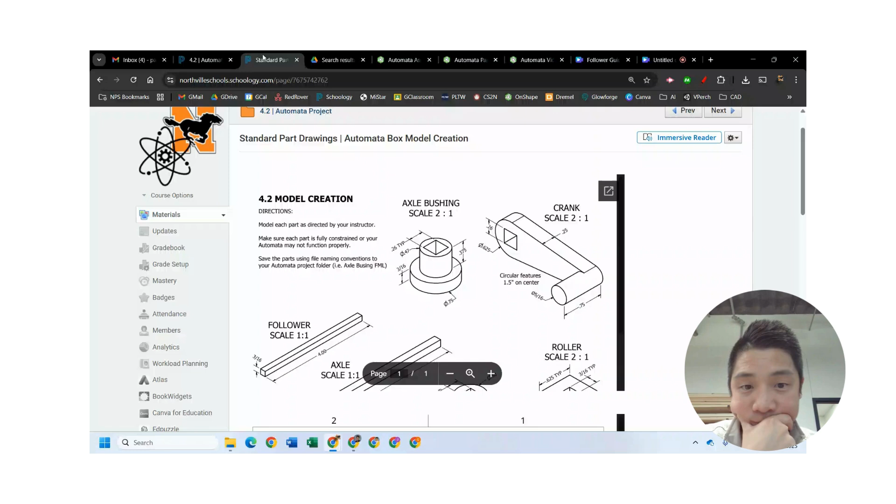All right, next video here is dealing with the crank. So this is what's going to connect to the axle and allow you to hand crank your automata. All right, so what I'm seeing here is a couple of circular features connected here. I'm going to assume that those are tangent to this circle as well.

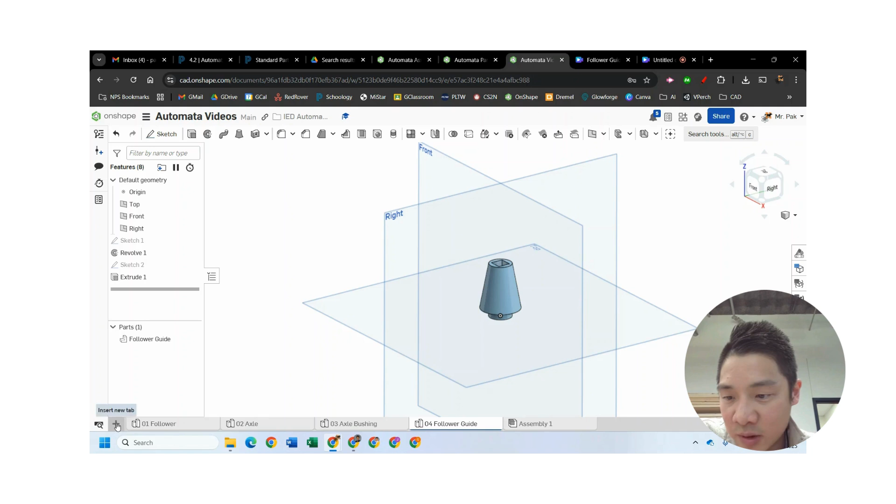That little crank has its own diameter. The thickness here is a little bit longer. So it might be a couple extrudes, but besides that, should be pretty straightforward. So let's get into it. All right, next up, we hit a new Part Studio. I'll go ahead and rename that now as 05 crank and start sketching.

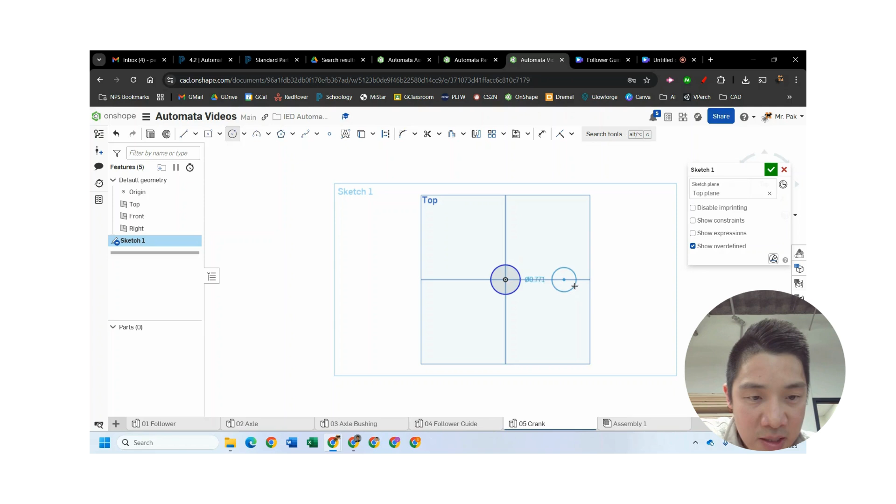We'll sketch this one on the top plane, normal to that. And I'm going to start with a couple circles. So I'm seeing circle here, and then along that, I'm going to make sure it lines up to the horizontal like this. Slightly smaller circle on that side. And let's double check the sizing here. We've got a 0.625 diameter on one end, so dimension this side as 0.625.

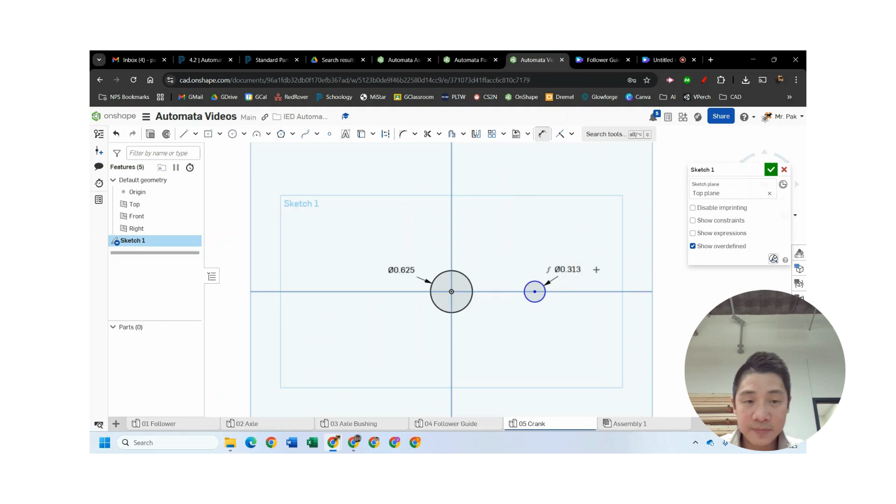The other side was showing a 5/16 as shown there. So let's bring it here, 5 divided by 16. And the other part that you hopefully notice, it says circular features 1.5 inch on center. So that means the distance between here to here is 1.5.

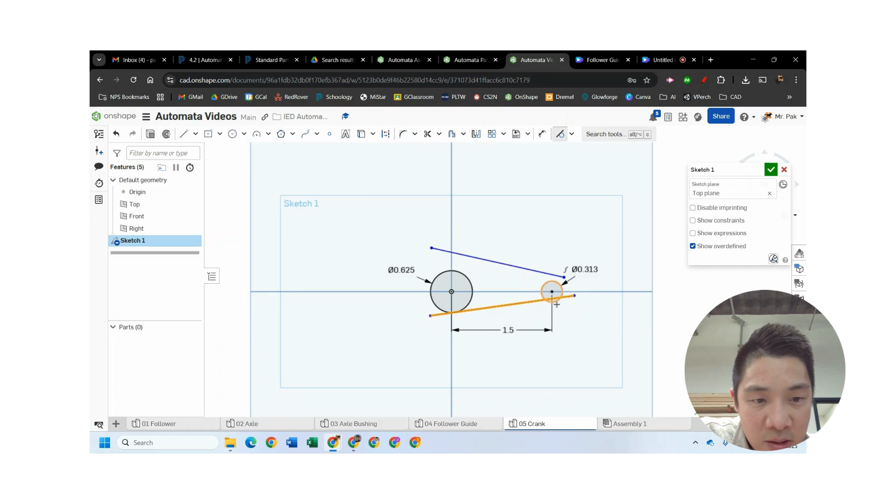All right, after that, I'm going to just draw a line, and I'm going to draw them intentionally off to the side like this. Again, kind of arbitrary angles. And what I'm going to do is use my constraints to make them tangent. So tangent from here to here, from here to here, and then same for this top line to that circle here to here. And then I'm just going to go ahead and trim the excess edges.

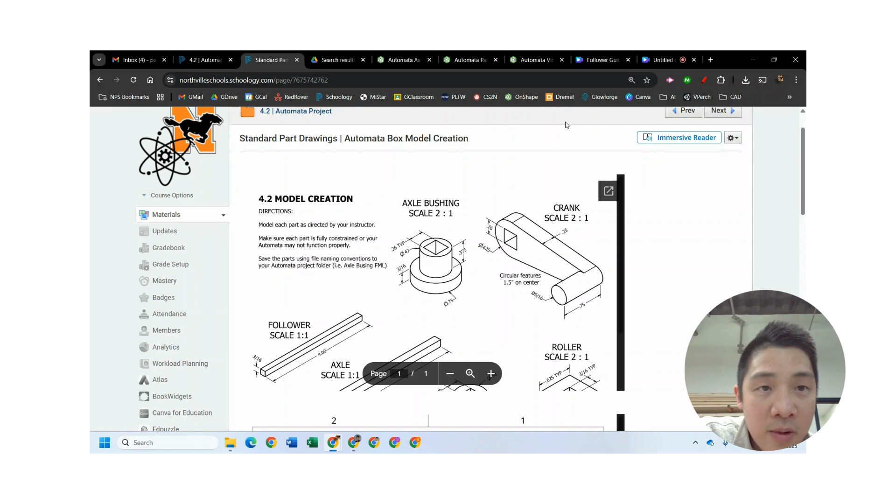So hit that little scissor tool and trim off these edges, something like that. And let me double check here. Yeah, that covers most of it. Actually, at this point, I could also add that square hole for the axle. So let's go ahead and do that now. Save us a step. So again, center point rectangle is what I would suggest.

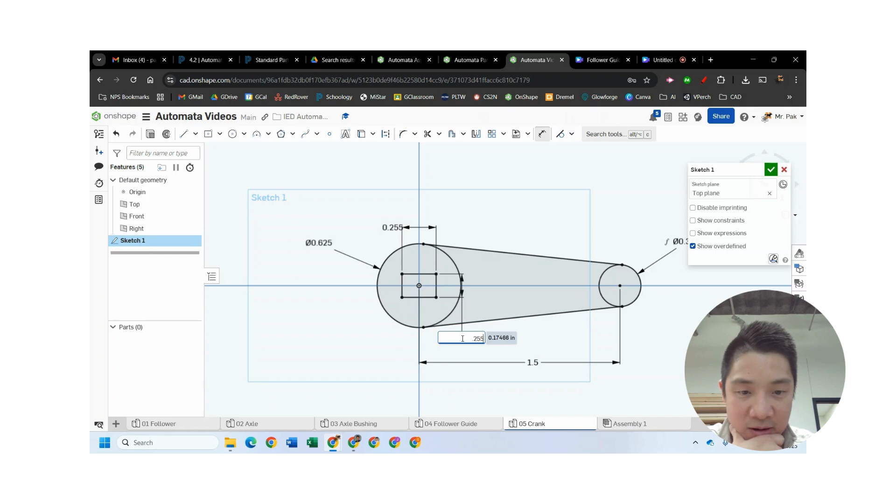Make sure you center that. Click there. And using our tolerances for the axle, I'm going to do 0.255 and then another 0.255 on this side. Hit the check. All right, back to it here. We've got our sketch ready. So now next step would be an extrusion. So I'm going to hit extrude.

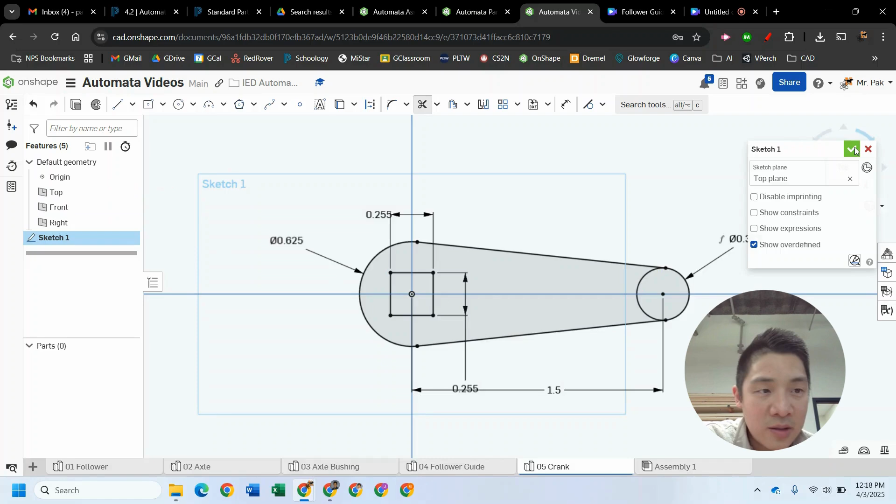Actually, one other thing that I would suggest, in your sketch, you can also clean up these extra lines. It'll save you some clicks later, and it also ensures you have the right thing selected. So I'm going to actually trim out this portion. This part I might leave because I'm going to ultimately also extrude that out a given distance. Okay, so hit the check for now and come back over here.

The thickness of it is 0.25. So I'll extrude this portion, the height of it 0.25. I'll leave it as blind for now. Hit the check. And similarly, this portion of the crank where you'll hold on to is 0.75.

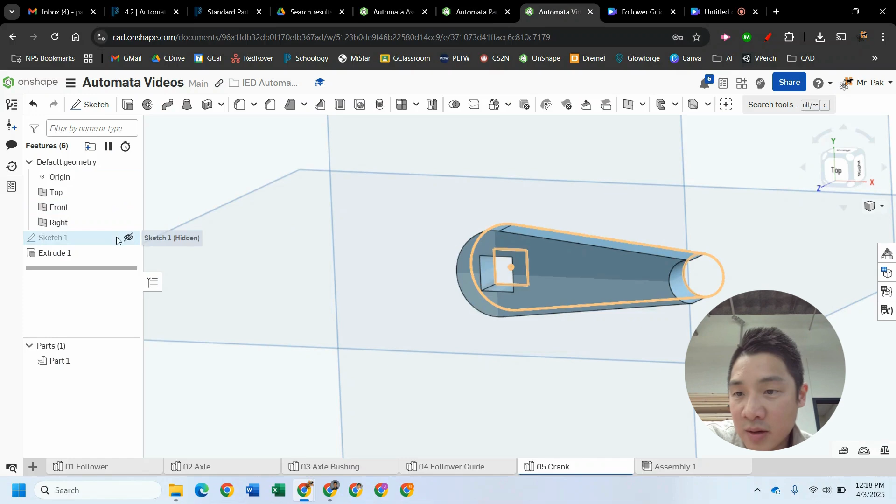Come back over here. You might need to unhide the sketch so you can see it again. Extrude, click that face, change that to 0.75 and hit enter. And we've got our crank. All right. Organization wise, come back over here, right click, rename, call that crank. We're good to go.